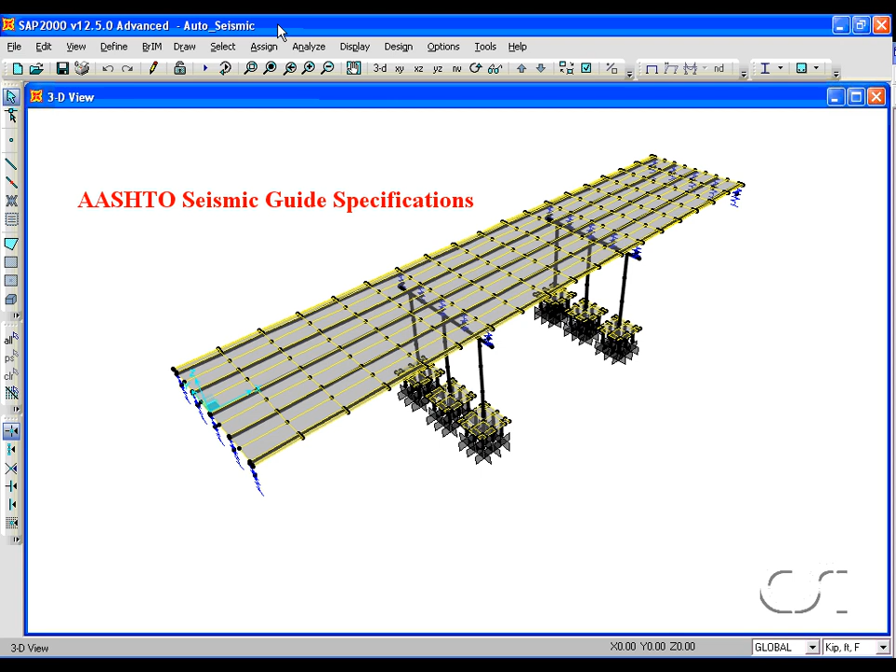This tutorial will show the powerful tools that the SAP 2000 Bridge module offers for the automated seismic design of bridges. Following the procedures described in the AASHTO seismic guide specifications, SAP 2000 can automatically calculate demand capacity ratios, including those for seismic design Category D bridges, and can produce a report containing all design results.

The seismic design of bridges using SAP 2000 consists of 8 basic steps. A quick overview of these 8 steps is as follows. In Step 1, we construct the model using bridge objects. The focus of the seismic design is on the bents. These bents will be isolated by the program when doing a pushover analysis.

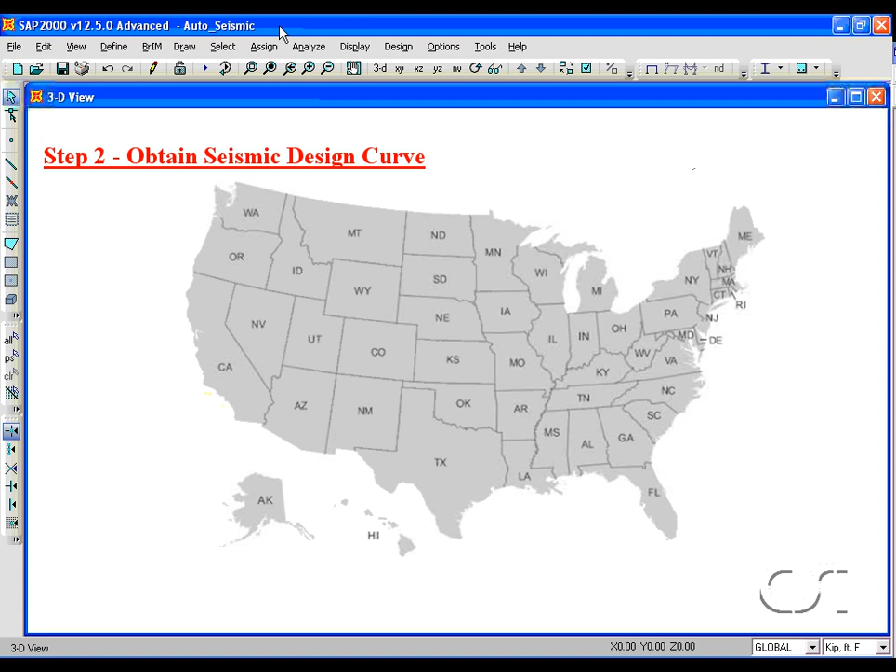In Step 2, we determine the ground motion hazard. This can be done by simply giving the bridge coordinates using latitude and longitude or zip codes. In Step 3, the program applies the dead load to the entire bridge and calculates the cracked section properties of the columns.

In Step 4, the program calculates the modes, performs response spectra analyses, which then gives the demand displacement values. If the bridge is a seismic design Category D structure, the bents and foundations are modeled with equivalent loads in Step 5.

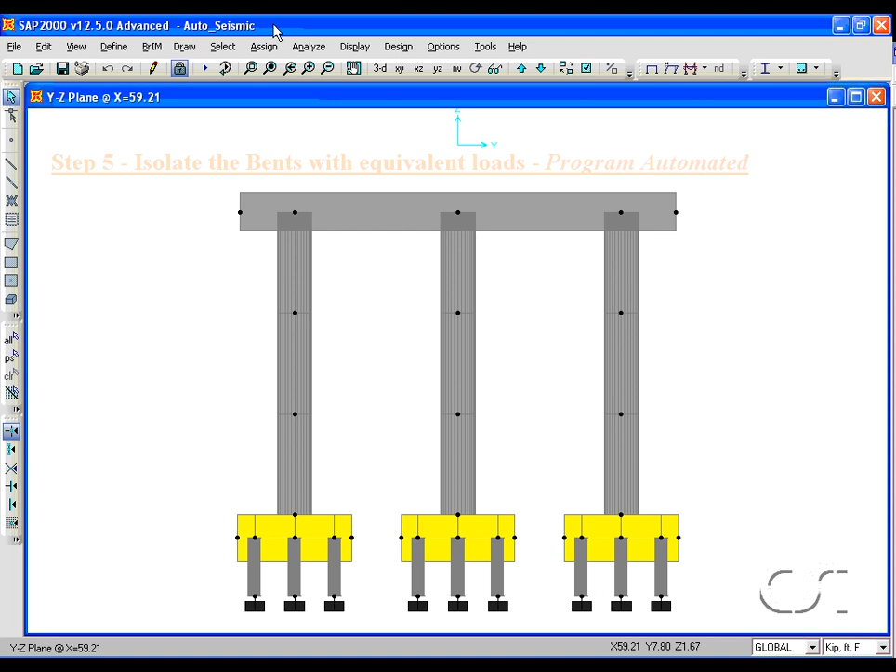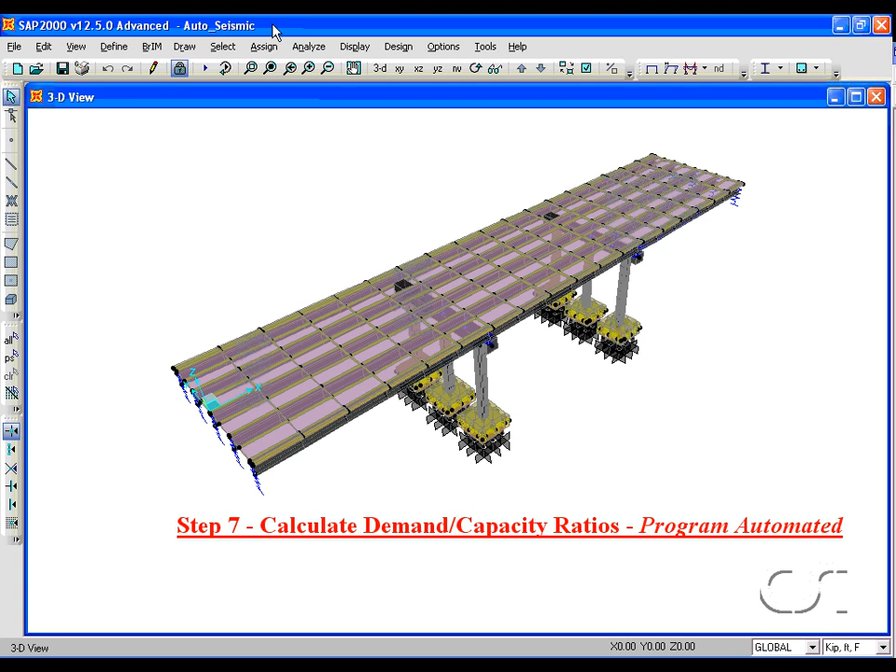In Step 6, the program calculates the displacement capacity; code equations are used for seismic design categories B and C, and a pushover analysis is performed for Category D. In Step 7, the program calculates the demand capacity ratios, and in Step 8, a seismic design report is produced. Now let's take a closer look at each of these steps.

Step 1, building the model. Our model has 3 spans of approximately 60 feet, consisting of an 8.5-inch slab supported with 5 3-foot 3-inch deep precast concrete girders. 2 bents, each with 3 36-inch diameter columns 26.5 feet tall.

These columns could have been fixed at their base, but for our model we are including a foundation consisting of a 4-foot thick pile cap supported by 14-inch diameter concrete piles with steel casing. Because seismic design is automated, the bulk of the work for the user is in building the bridge model. However, building a model is described extensively in other Watch and Learns, so we will go through this first step rather rapidly. Here's how we built the model.

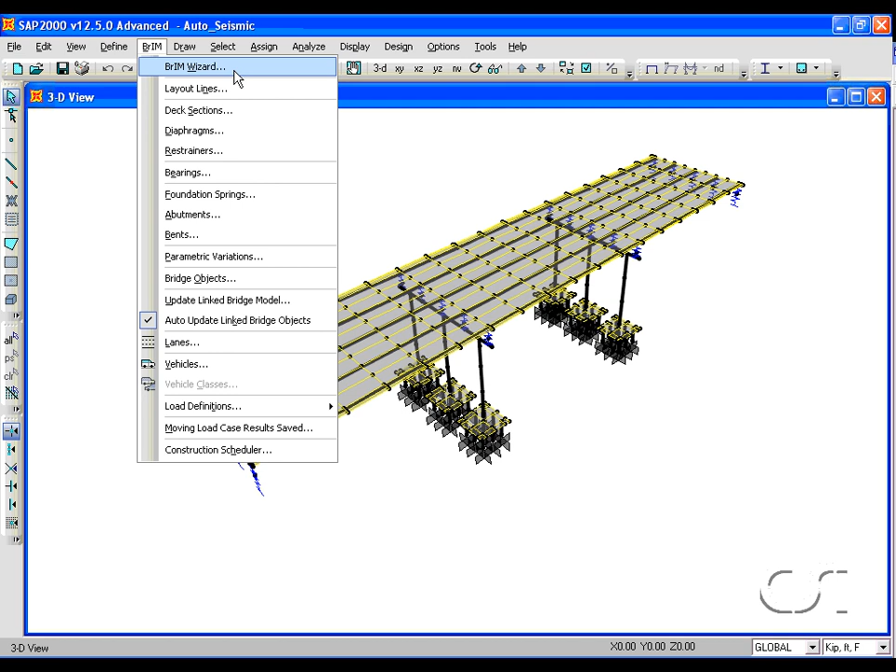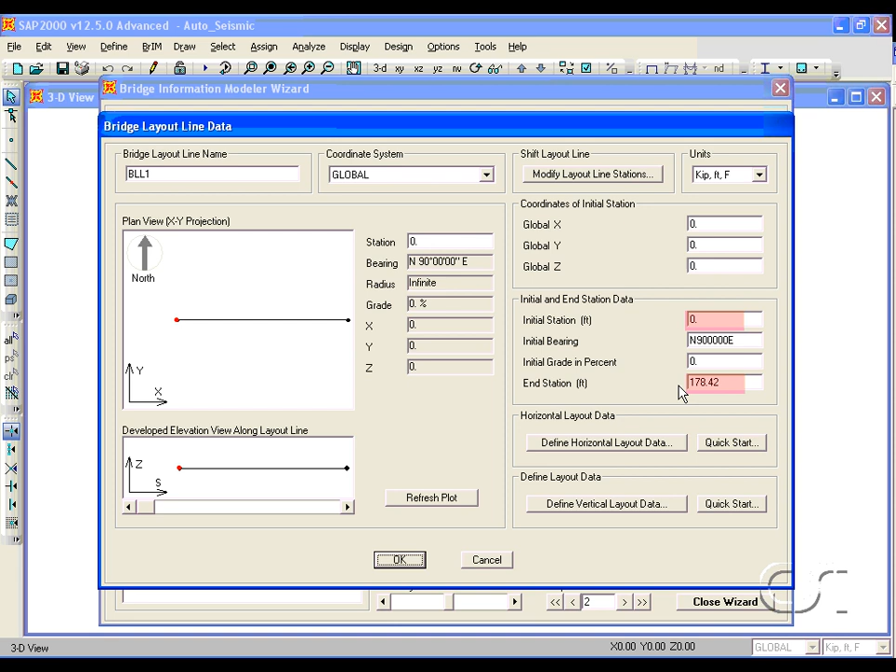We started by going to the Bridge Information Modeler wizard. The wizard guides you through the modeling procedure. The first item is the layout line. Double-clicking shows that we have one line defined. The line provides the coordinate stations for the bridge. Our model has 2 stations, an initial station and an end station 178.42 feet away.

For materials, we will use the 4000 psi concrete and the A615 Grade 60 for the reinforcing steel. Check the Show Advanced Properties option so that we can review the nonlinear settings for these materials.

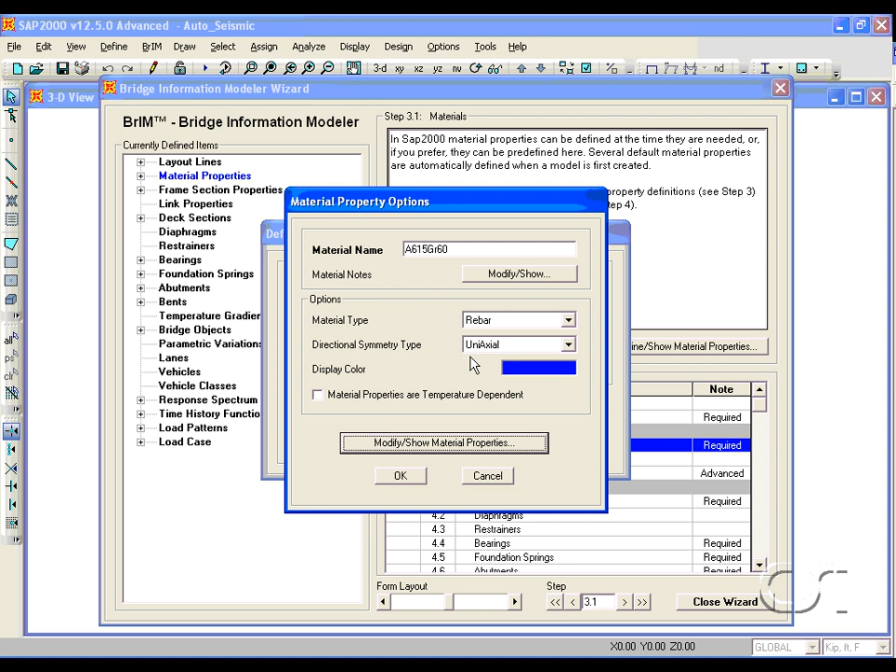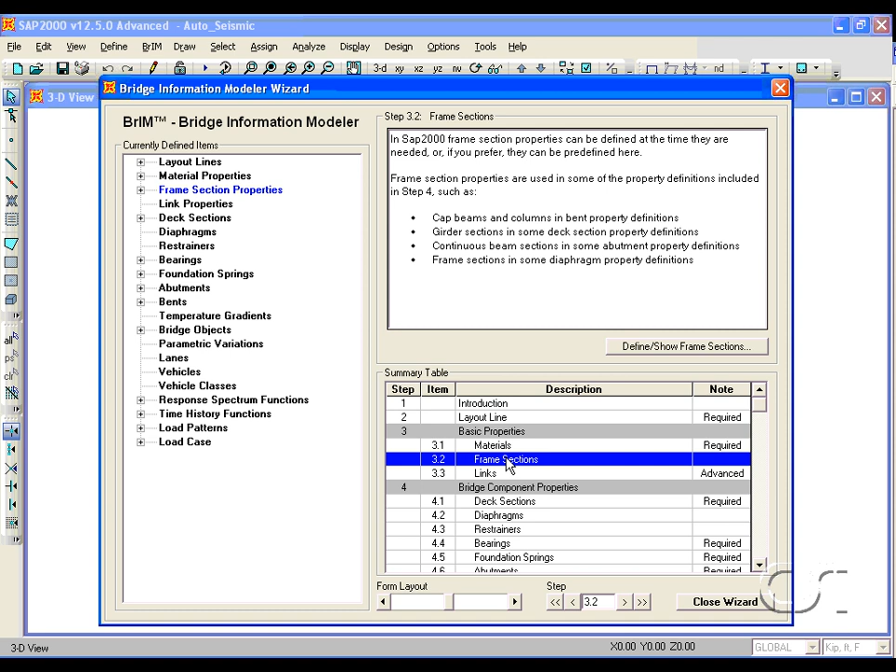Next on the list is the frame sections. The cap beam, the column, the precast I girder, and the pile. The BRD sections shown on the list are equivalent frame sections created by the program to represent the combined behavior of the deck plus the precast girders when doing a spine model. The cap beam is a rectangular section 39 inches deep by 42 inches wide.

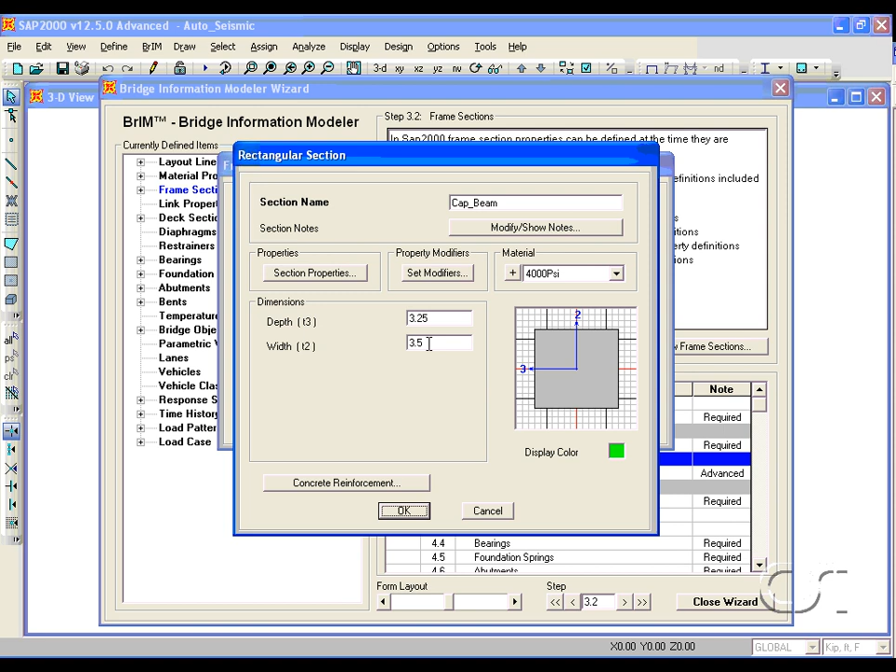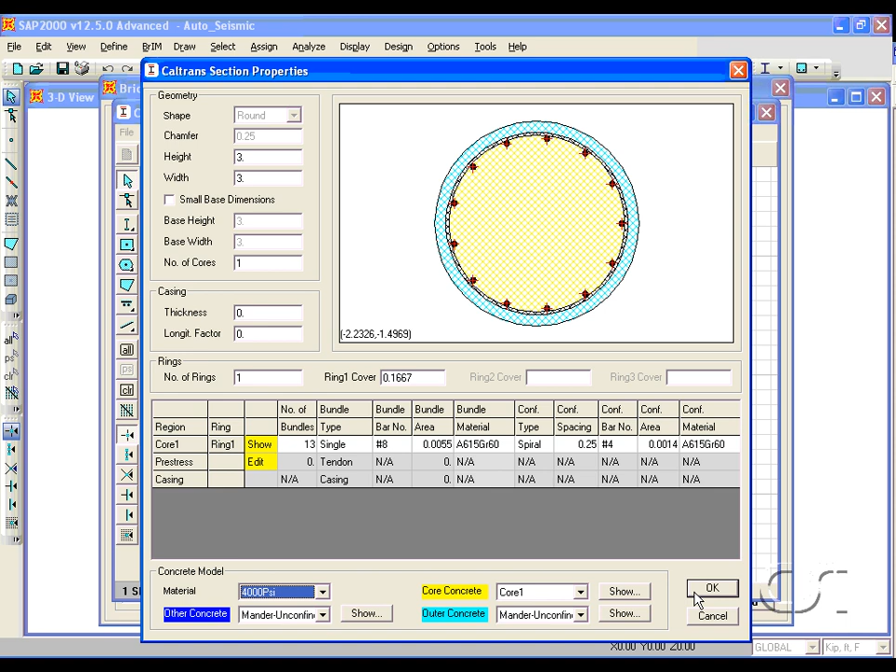The bent column section was created using the section designer. A right click shows that the section is 3 feet in diameter with 13 number 8 bars for longitudinal reinforcing and number 4 spiral confinement. The girder was created using the precast concrete girder form. Note that it is 39 inches deep and 13 inches wide at the top.

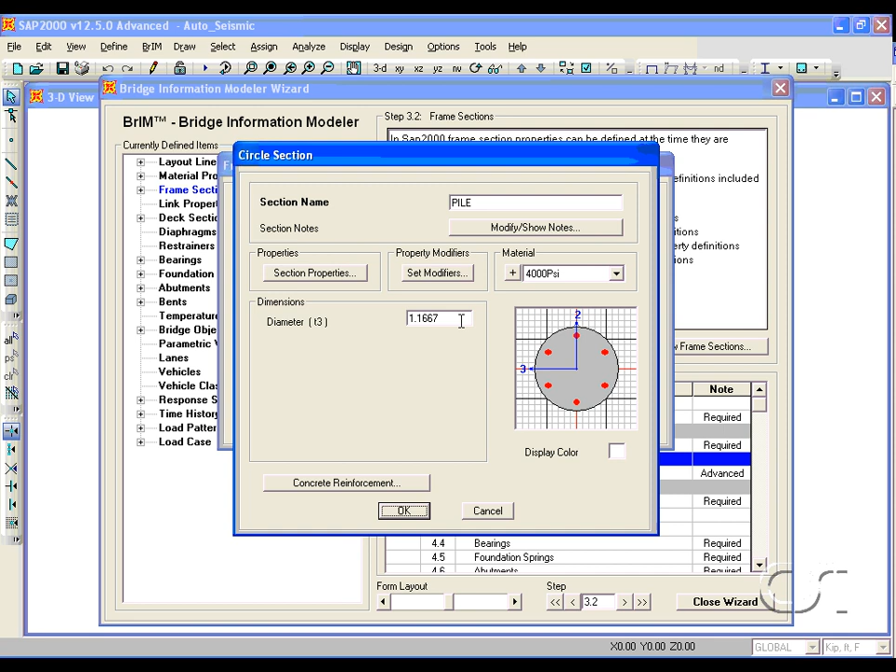The last frame section created by us was the pile. We created a round concrete section with a 14-inch diameter. However, the pile has a steel casing, so to account for this, we assign property modifiers to increase the moments of inertia.

Now we move on to the bridge component properties. Double-click on the deck section. We have a single deck defined with 3 interior girders and 2 exterior girders, which gives us a total of 5 girders. The girder section is the precast section just discussed. The deck has a width of 38 feet 10 inches and a slab thickness of 8.5 inches. The program takes this complicated cross section and converts it into a single BRD frame section for use when doing spine models.

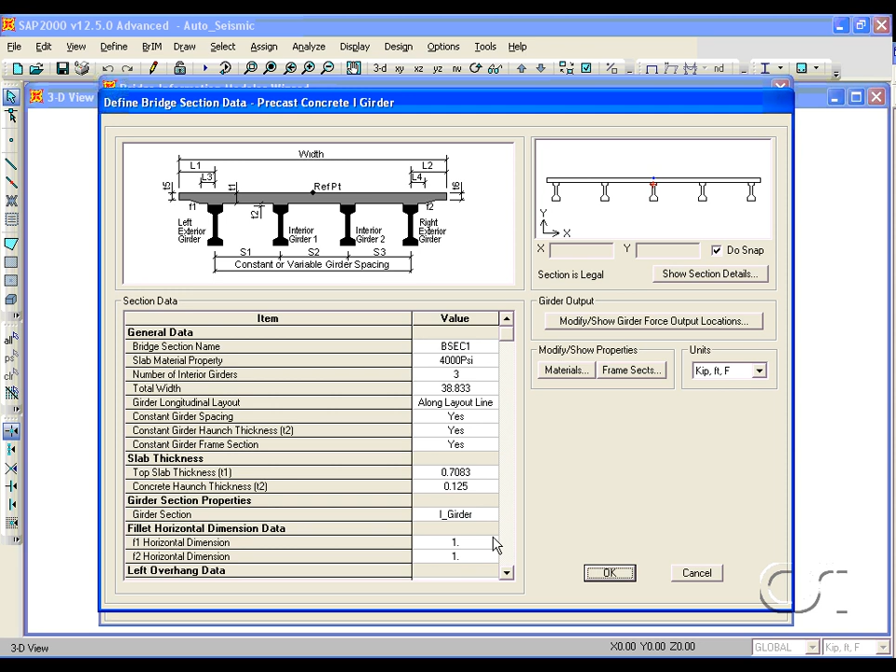The next item to review is the bearings. We have 2 different bearings. The first bearing is for use at the abutments and restrains motion in the vertical direction. The second bearing is used at the bents and restrains translation in all 3 directions.

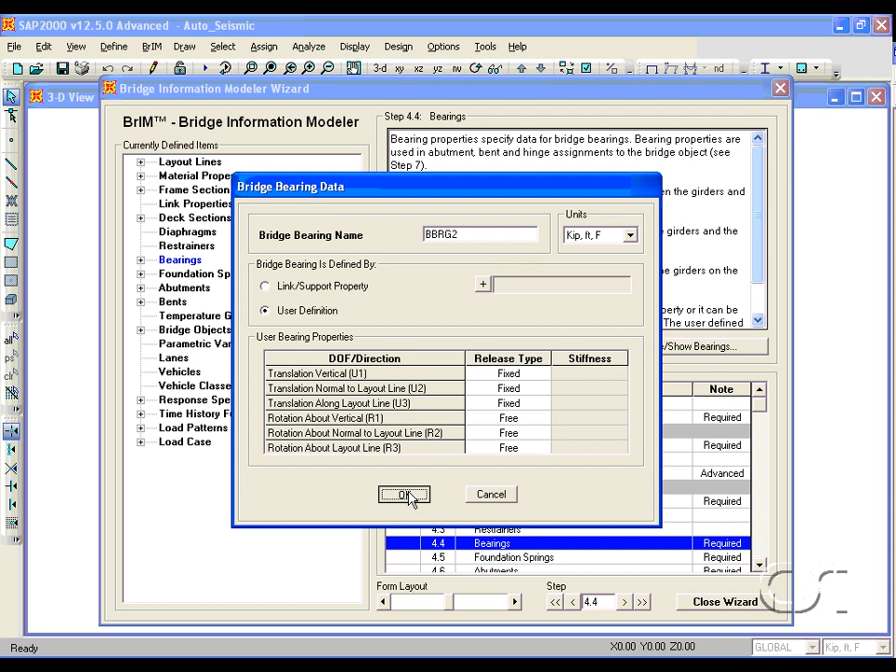Next is the foundation spring. We have defined one spring property to be used at the bottom of the bent columns. In this case, all releases are set to free, as we want the forces from the columns to be transferred directly into the pile cap foundation. If we were not explicitly modeling the foundations, we would set some or all of these releases to fixed.

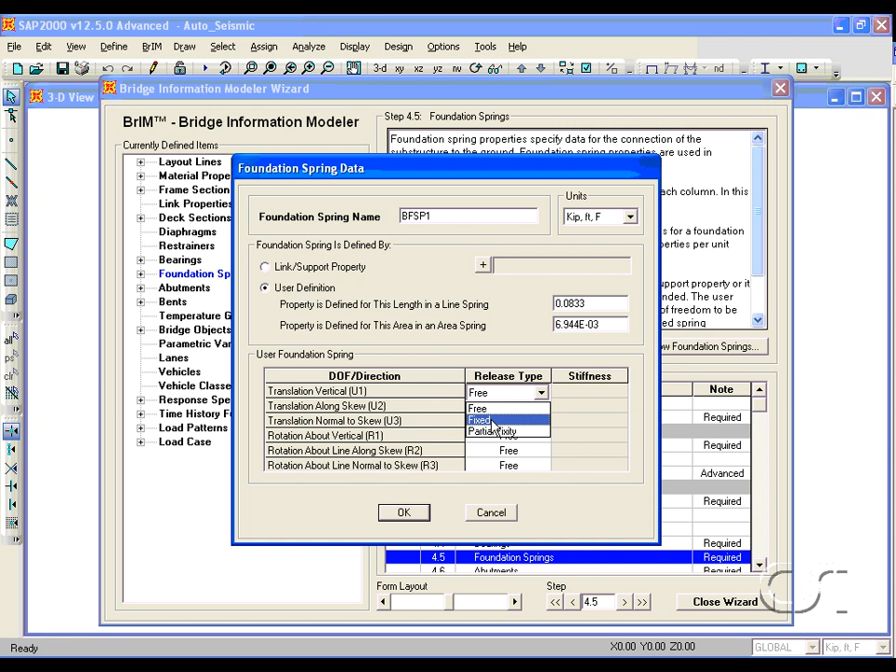For the abutments, we have a single type that provides a fixed connection to the bottom of the girders.

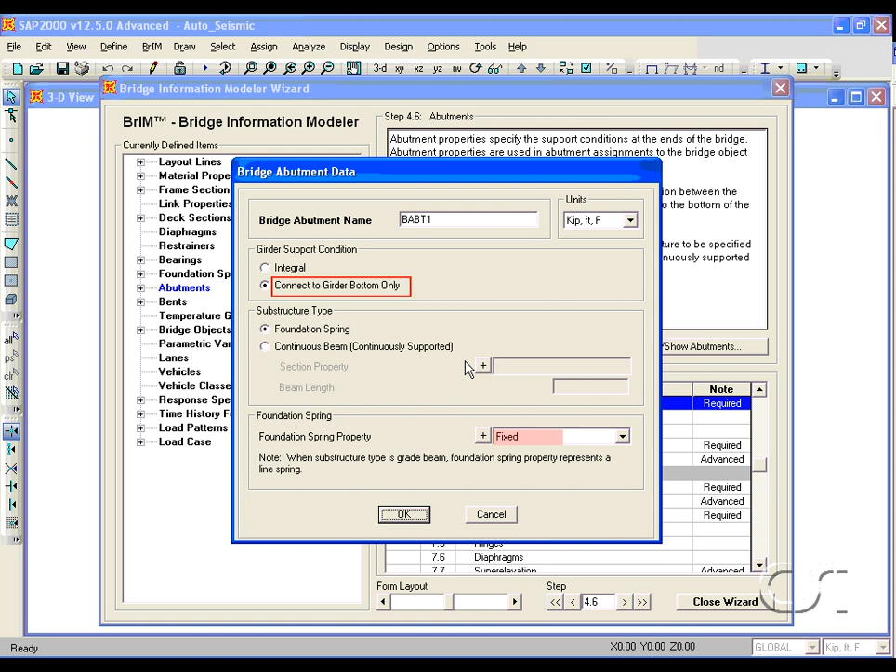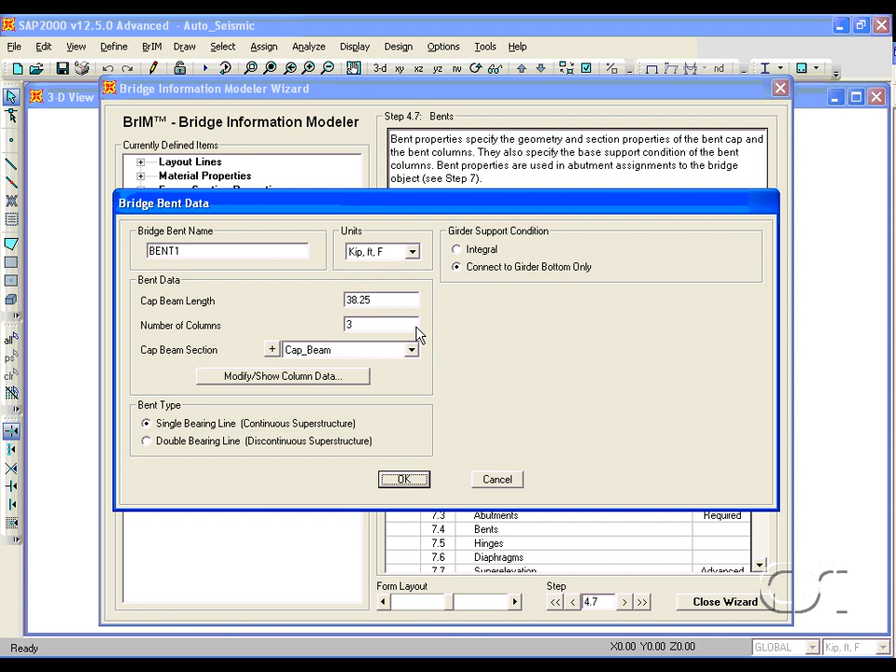We have defined a single bent for both locations. The bent consists of 3 columns topped with the cap beam we defined. The columns are 26.5 feet tall and use the previously defined foundation springs for the base support. At the top of the columns, all connections are fixed to the cap beam.

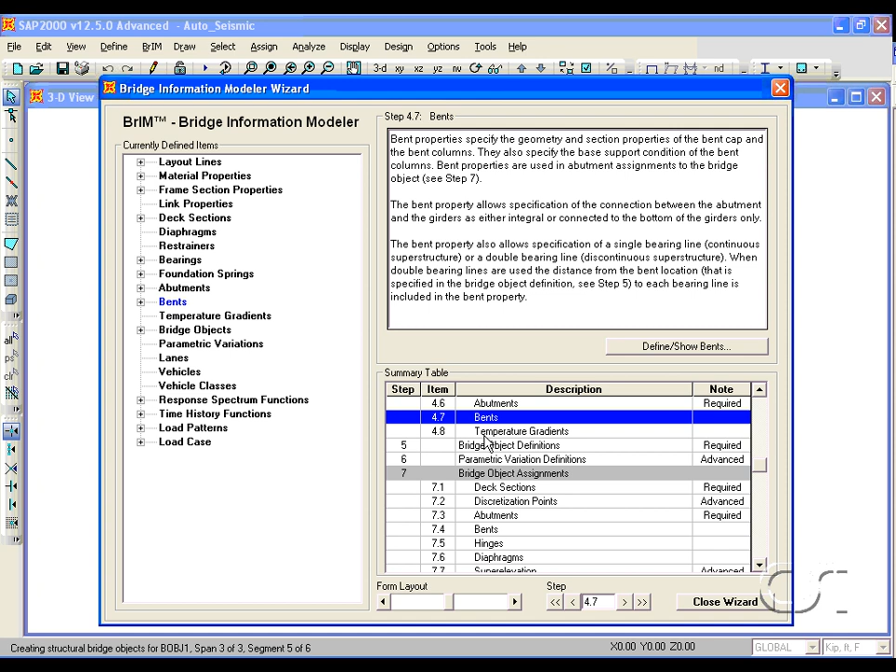Next is the bridge object definition. The bridge object tells SAP 2000 how to assemble the previously defined components into a bridge system. The bridge object assignments allow SAP 2000 to isolate the loads and the bents that are used when doing the automated seismic analysis.

For this model, we have a single bridge object that contains all of the components for our 3-span bridge. The reference line for the bridge defines the abutment and bent locations. Selecting spans and clicking the Show button, we see that the deck section is assigned to each span with no variation.

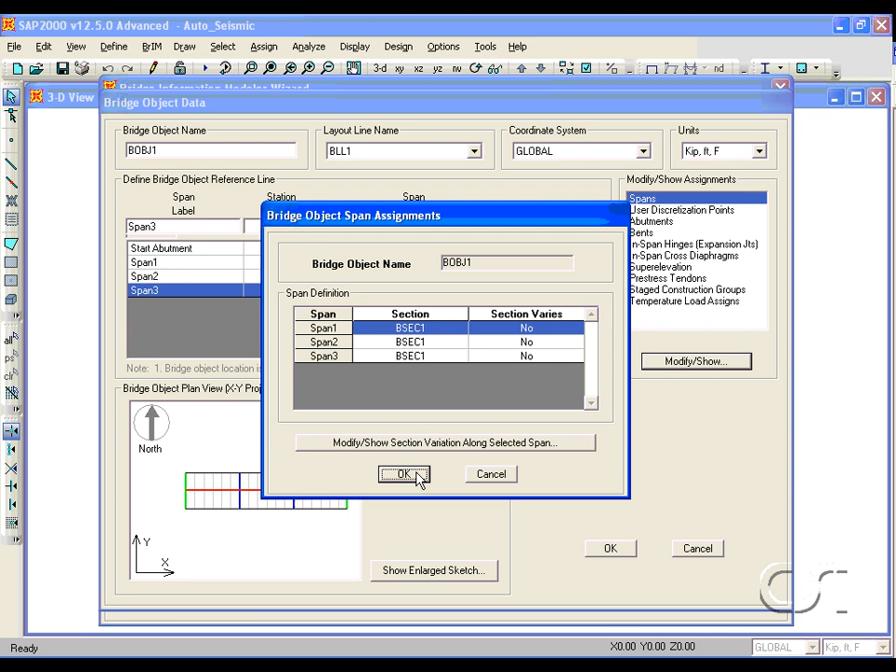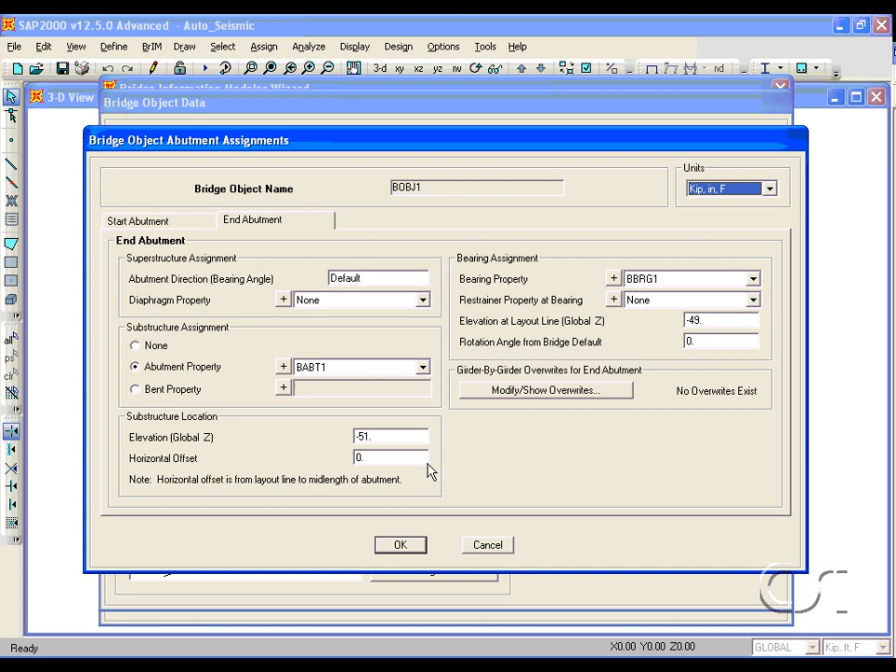The start and end abutments are the same. A 2-inch thick bearing resting on our fixed substructure. The bent assignments for each span are also identical. Again, a 2-inch bearing resting on our bent structure.

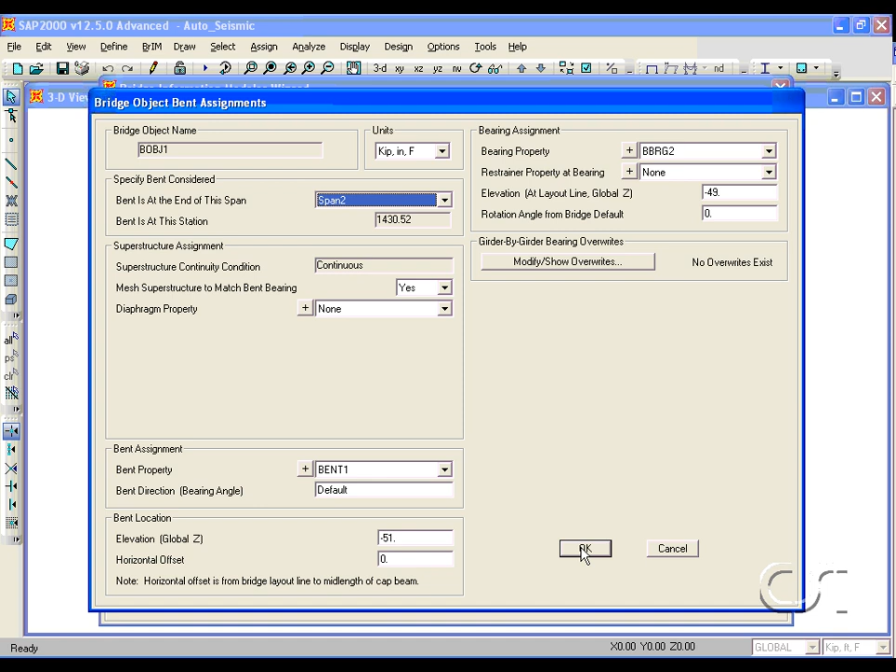After doing the assignments, it is important to link the model so that all components are included in the model.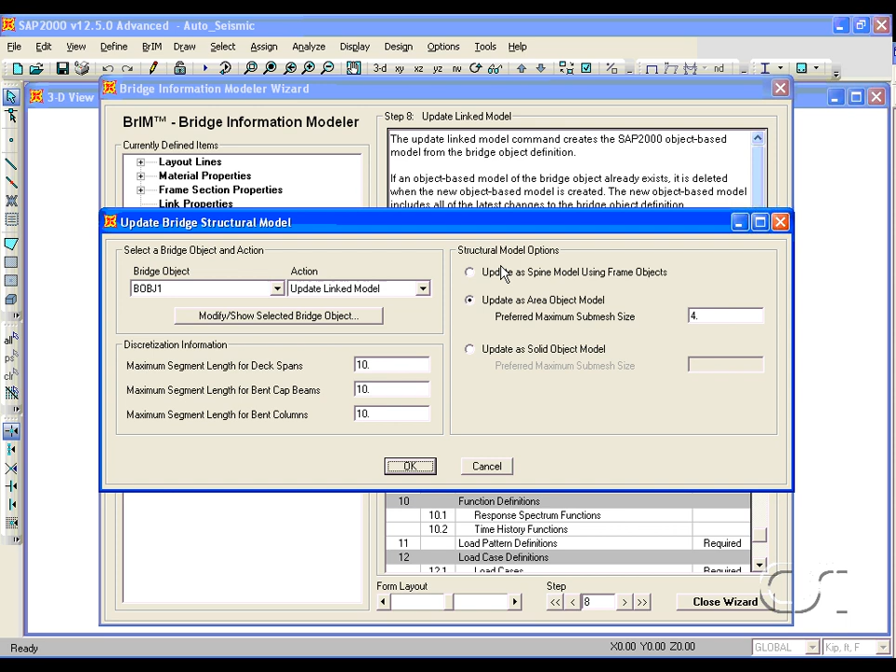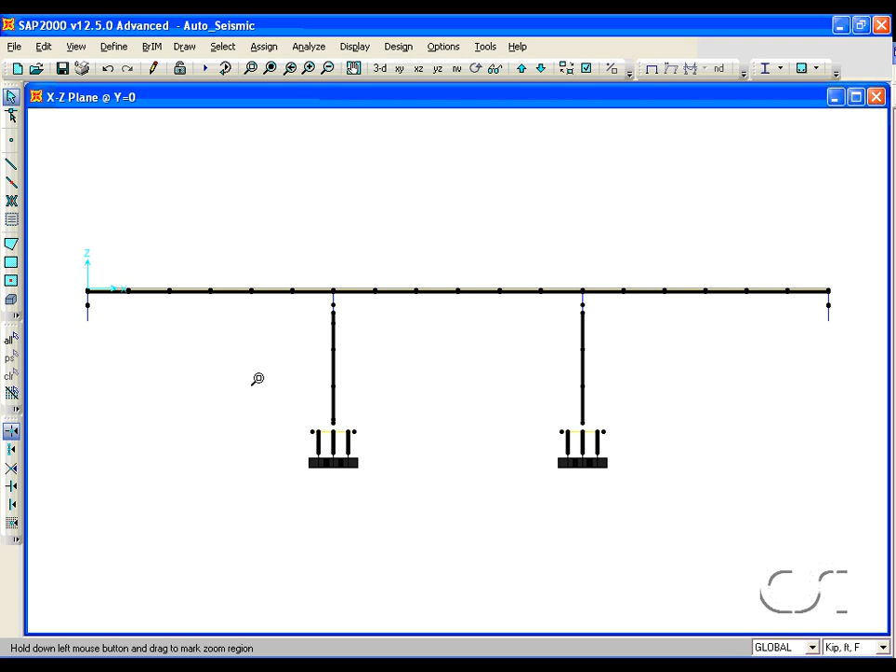Our superstructure is complete. The only item we did not review in the Bridge Wizard was the foundation. The foundation consists of a 4-foot thick area object for the pile cap, supported by the pile objects. Note how the bottom of the column is above the area object that represents the pile cap.

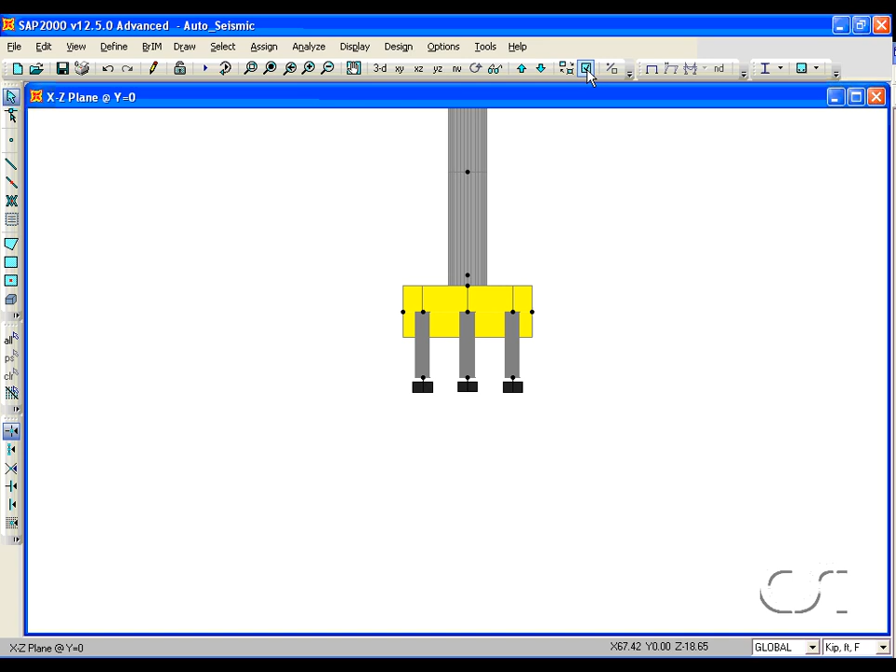If we extrude the objects, we can see that this is geometrically correct due to the thickness of the pile cap, but because the pile cap was modeled with a planar object, we use a weld constraint to connect the bottom of the column to the center of the planar pile cap.

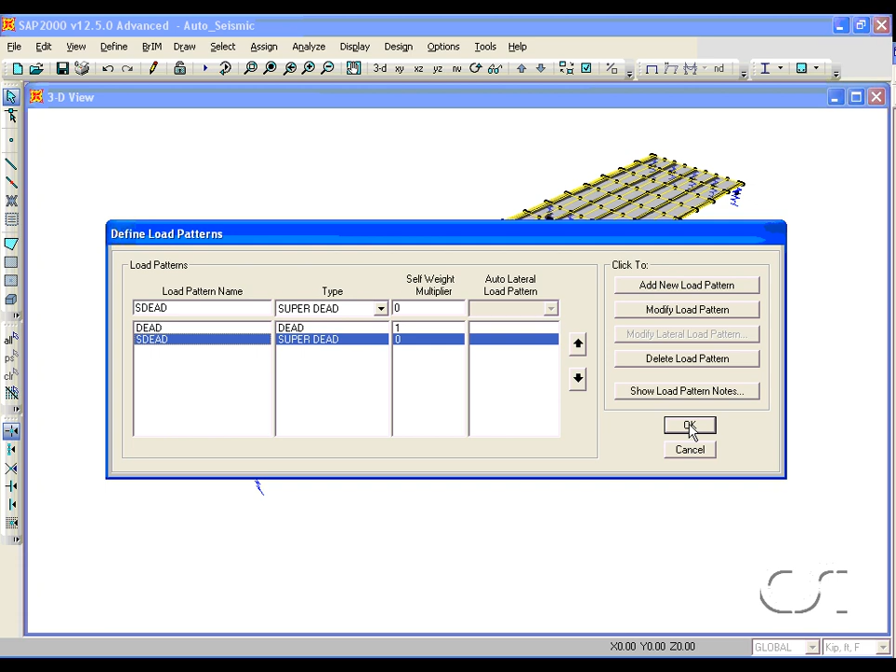For this model, the only static loads we will apply will be the dead and superimposed dead needed for the seismic analysis. We are now ready for step 2. Step 2 is where we determine the ground hazard.

We go to the Define, Functions, Response Spectrum command, and here we have many choices for response spectra functions. We will choose the National Cooperative Highway Research Program spectra. Function values may be determined by the program from latitude-longitude, by zip code, or by user input.

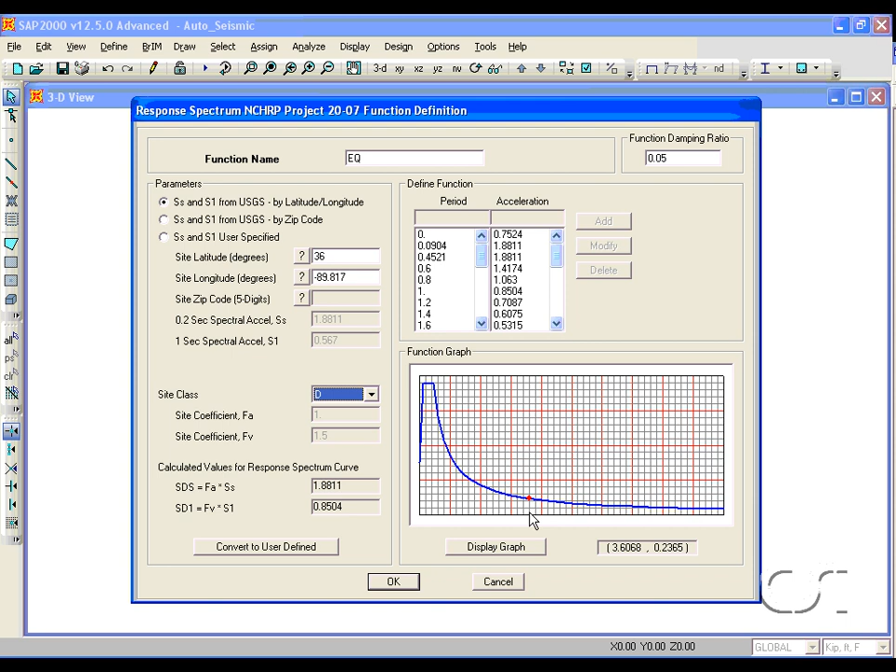We will input latitude and longitude. Note how the spectra values change based on the input. We will set the site class to D. With the determination of the site hazard, we are just about ready to start the automated seismic design.

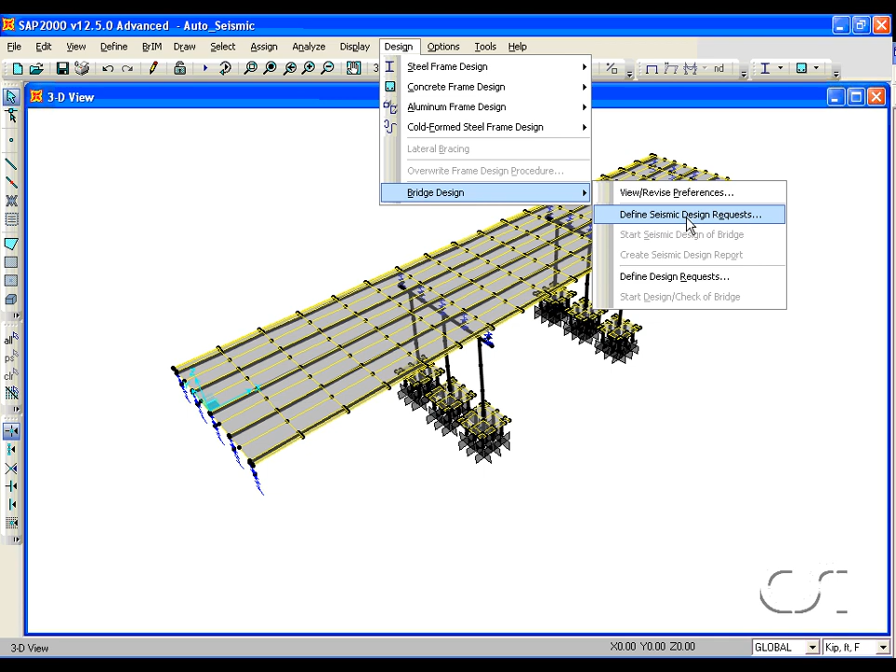The last bit of information that we must input is the design request. This tells the program what type of seismic design to do. Go to the Design, Bridge Design, Define Seismic Design Request command, and click on the Add New Request button. Note that the bridge object we defined is selected, as our model has only one bridge object.

Click the Modify/Show button and review the options set by the program. Note that the EQ function is selected, that the seismic design category is set to D, so a pushover analysis will be done. Also note that the entire structure is being used for the gravity load case. The cracked sections will be determined by the program, and that the modal load case will be program determined.

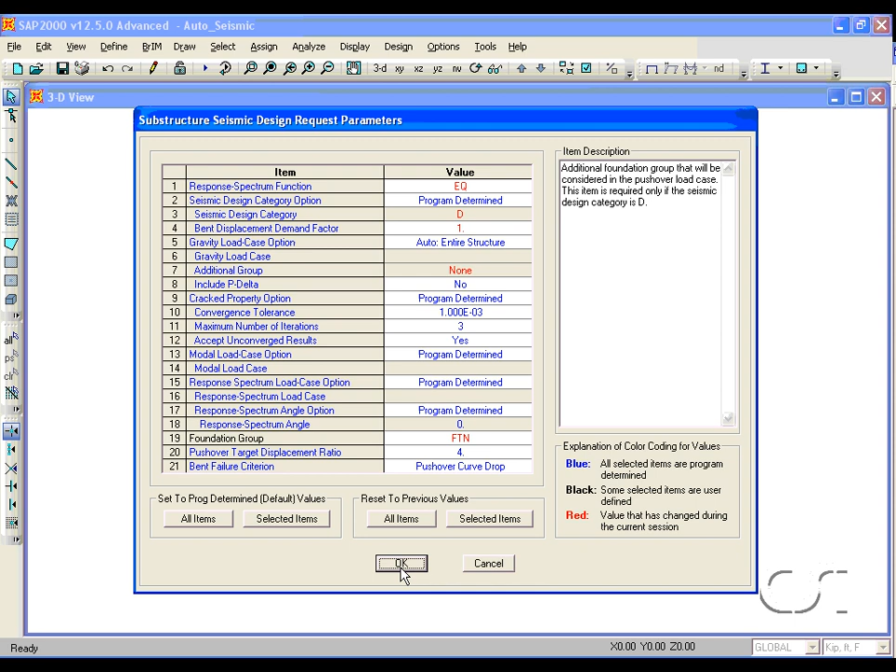Lastly, we need to identify the foundation group because we did not fix the columns at the base. Just to reiterate, the only load cases defined at this time are for the dead loads. We will return to this form after running the seismic design.

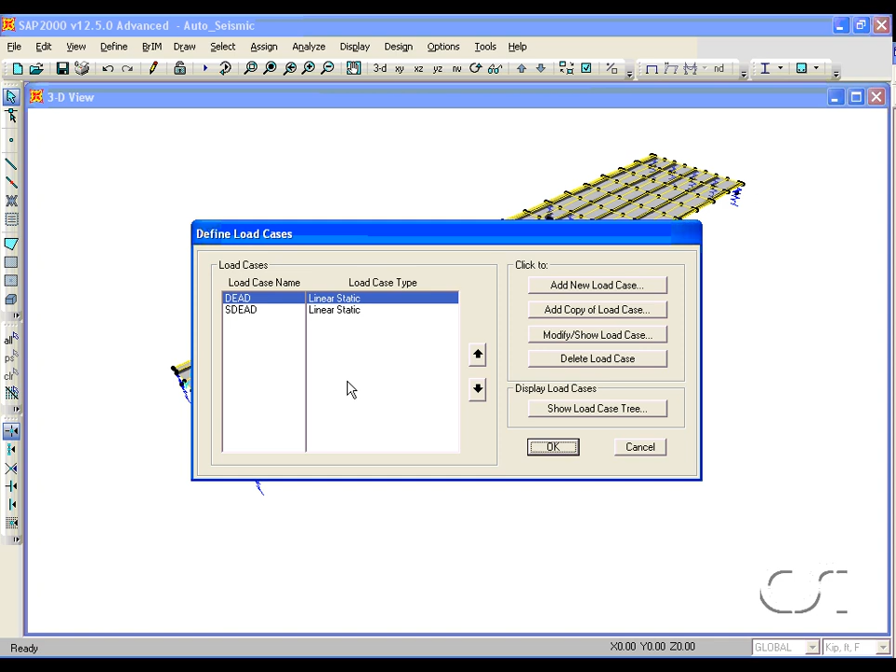The program will automatically create load cases for all of the other analyses that will be done, including modal and pushover. Now, we will start the automated seismic design procedure, which will do steps 3 through 7. This may take some time as a large number of different analyses are being done by the program.

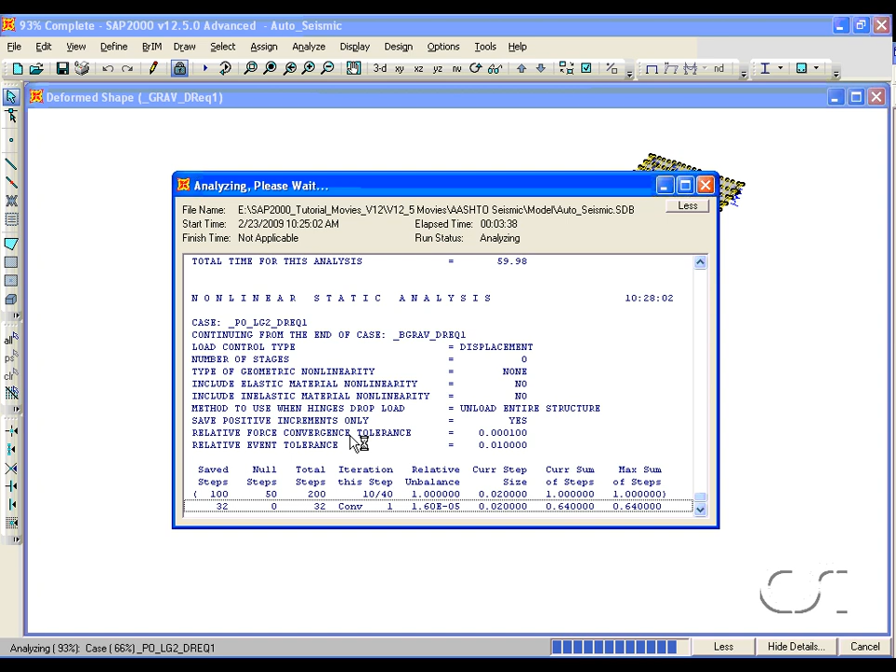Now that the analyses are complete, we can scroll through the analysis window to see exactly what the program was doing. First, it applies a dead load to the entire structure and iterates to determine the cracked section properties.

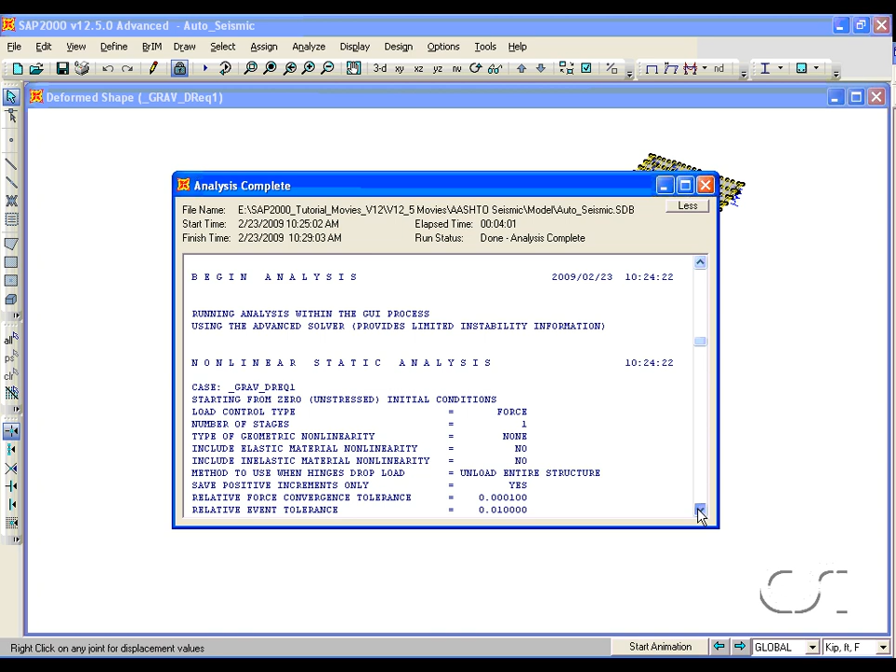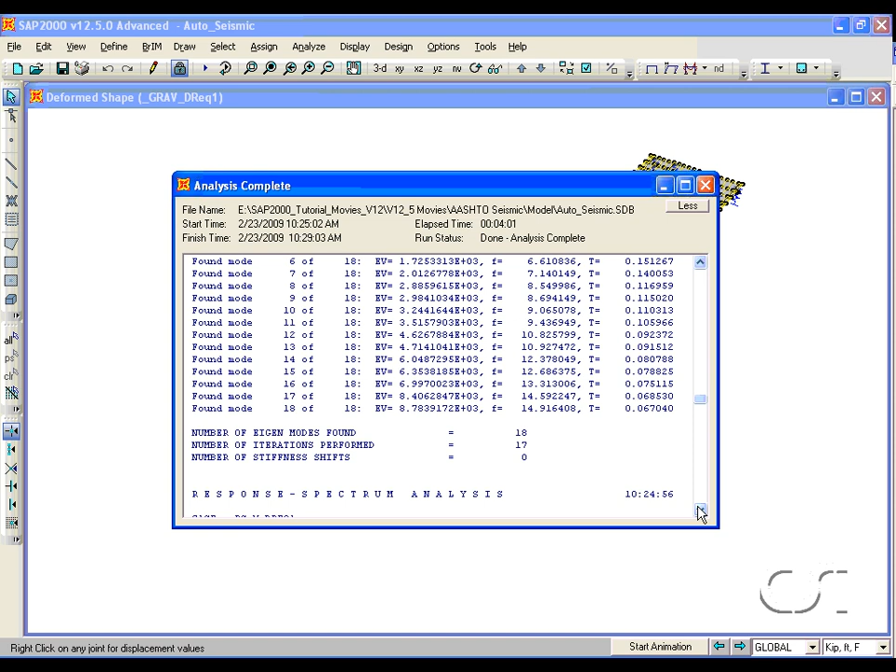Based on the cracked sections, it performs a modal analysis. With these modes, it performs 3 different response spectrum analyses. Next, it performs a dead load analysis using just the bents and equivalent loads. And lastly, it performs 4 different pushover analyses.

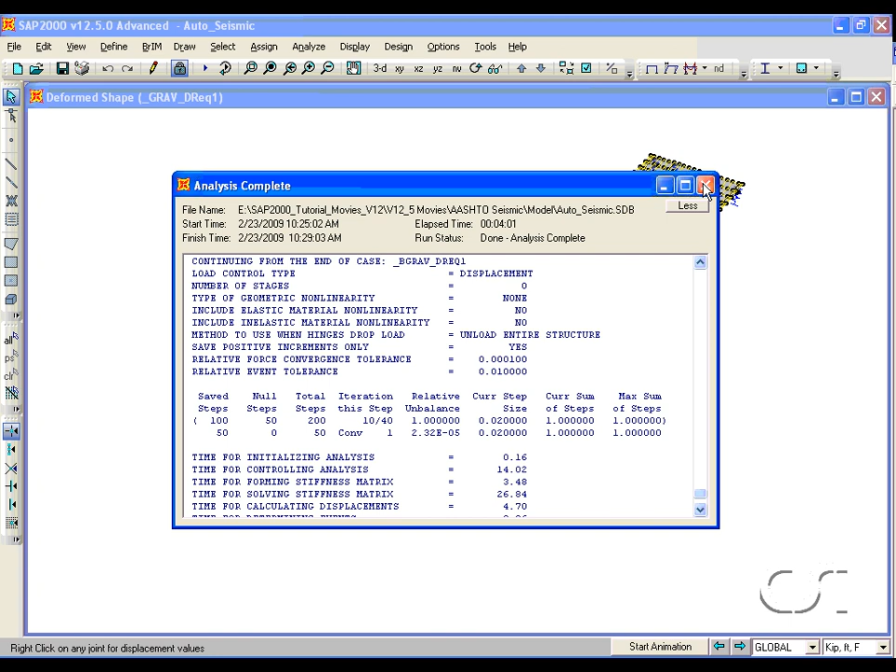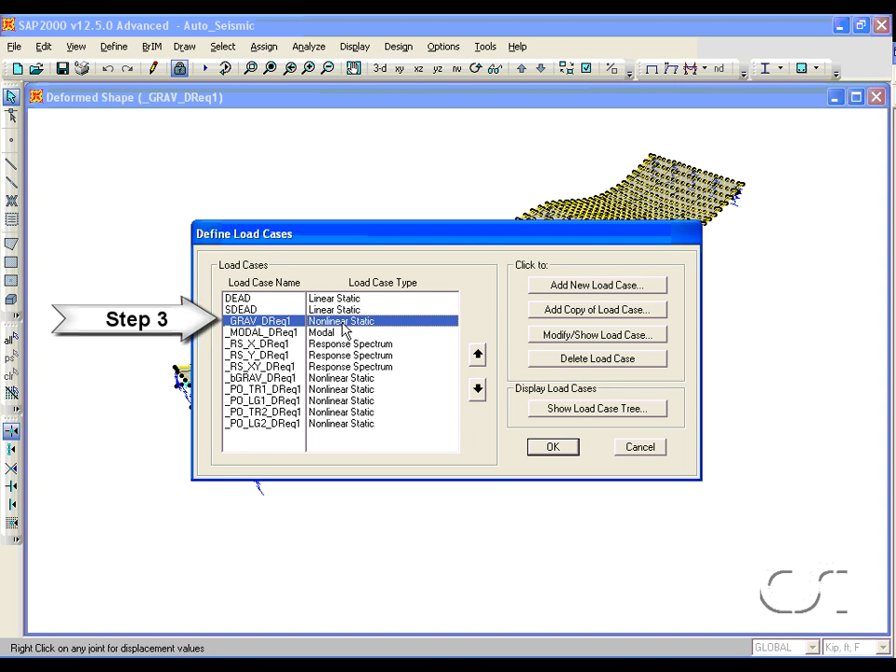Next, we will return to the load case form for a more detailed look at the automated analyses. Note all of the additional load cases that have been generated by the program. The first one represents the results of step 3, the application of dead load and the calculation of the cracked section properties. Dead load is applied to the entire structure along with the section modifiers.

This load case represents an iterative process when calculating the cracked sections. Element forces are determined, cracked sections are calculated, stiffnesses are modified, and the cycle is repeated until convergence is reached.

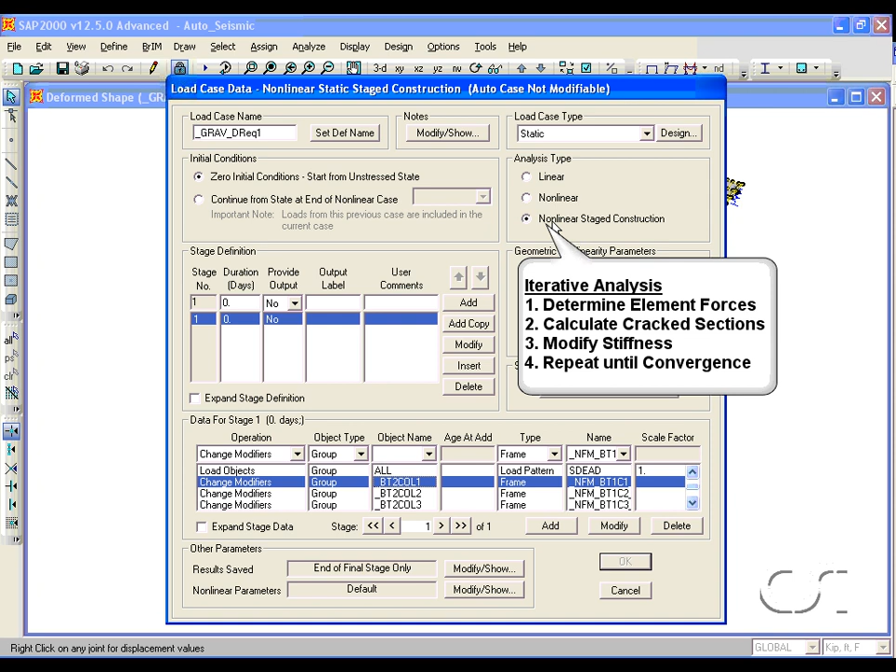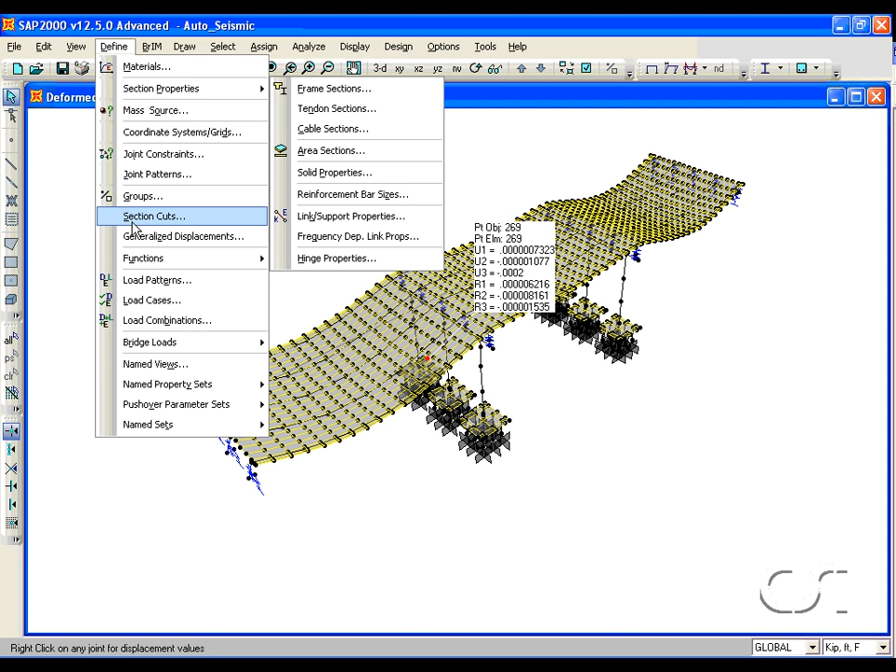The actual cracked section modifiers used may be reviewed by going to the Define Named Property Sets Frame Modifiers command. Here we see for Bent 1, Column 3, the moments of inertia are multiplied by approximately 0.28.

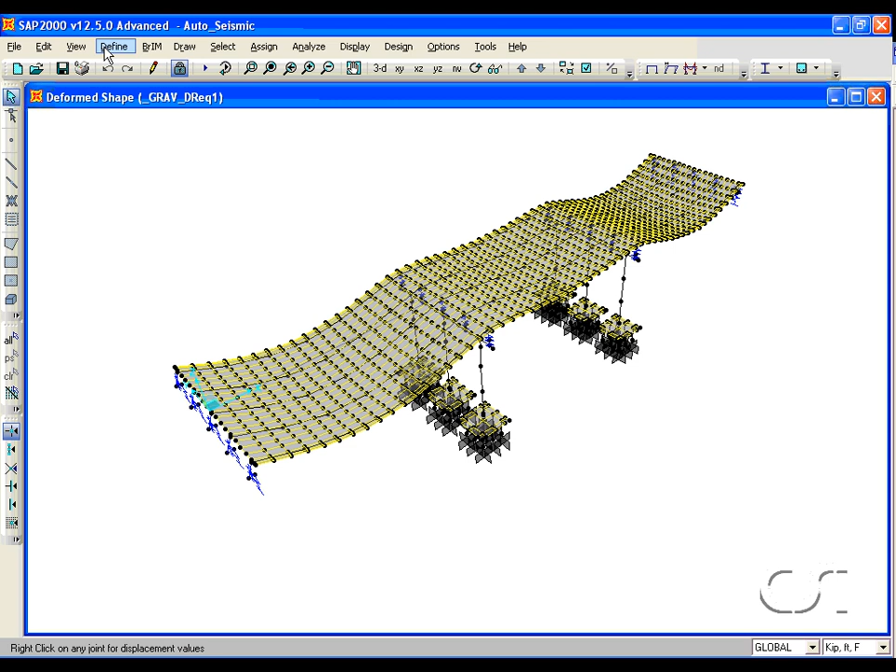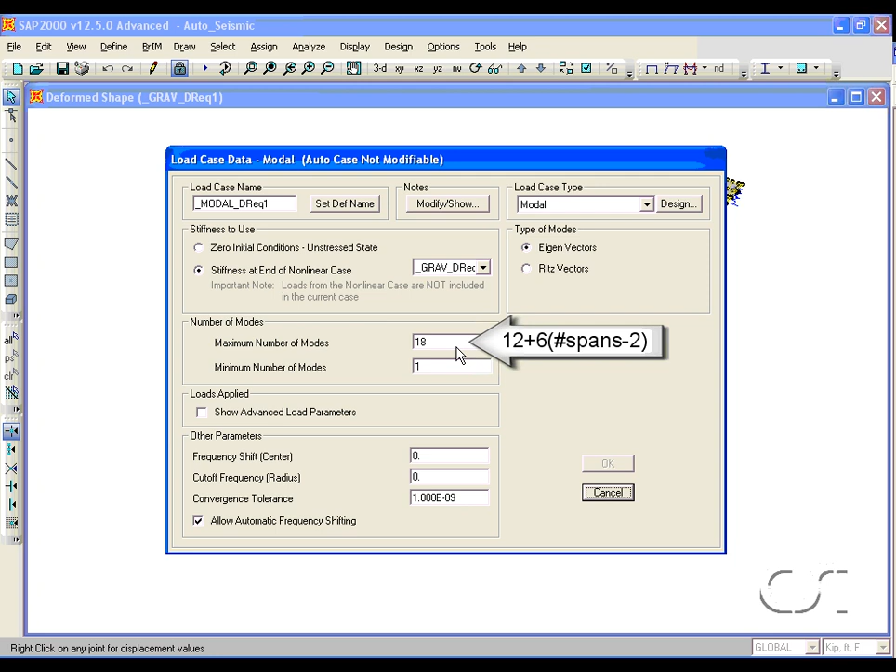The next four cases represent step 4, mode extraction, and then response spectrum analysis to calculate the demand values. Note that the modal case uses the gravity dead load case with the cracked sections as the starting stiffness. For this bridge, the program asks for 18 eigenvectors. The number of modes is determined by the equation 12 plus 6 times the number of spans minus 2, but no less than 12.

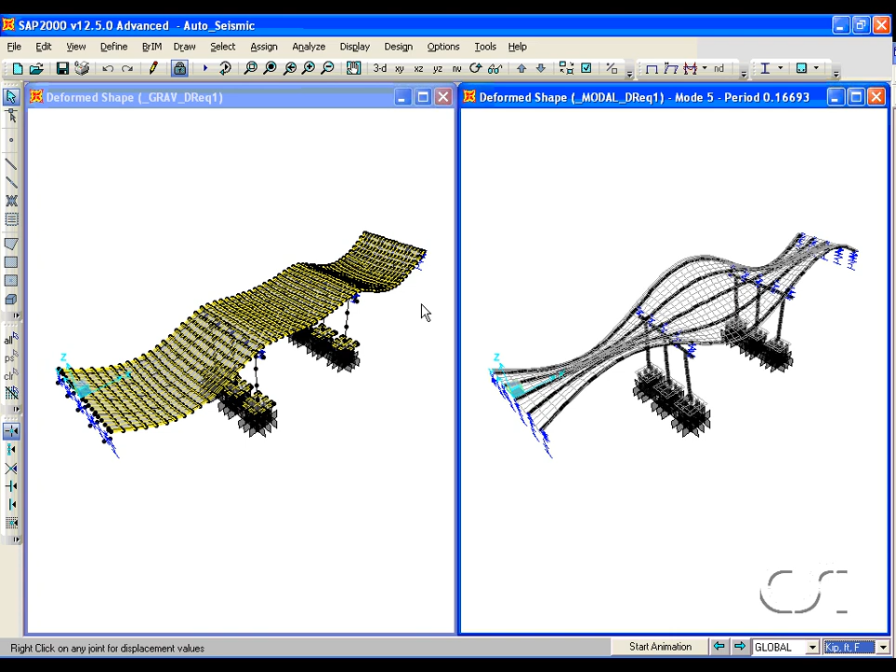Here are some of the modes calculated by the program. The next case is the response spectrum case in the x direction. Modal damping of 5% is used. The following case is the response spectrum analysis in the y direction.

And the last case applies the response spectra in both directions and combines them according to the AASHTO seismic guide specifications that require results to be combined using the 100-30% rule in each of the major directions.

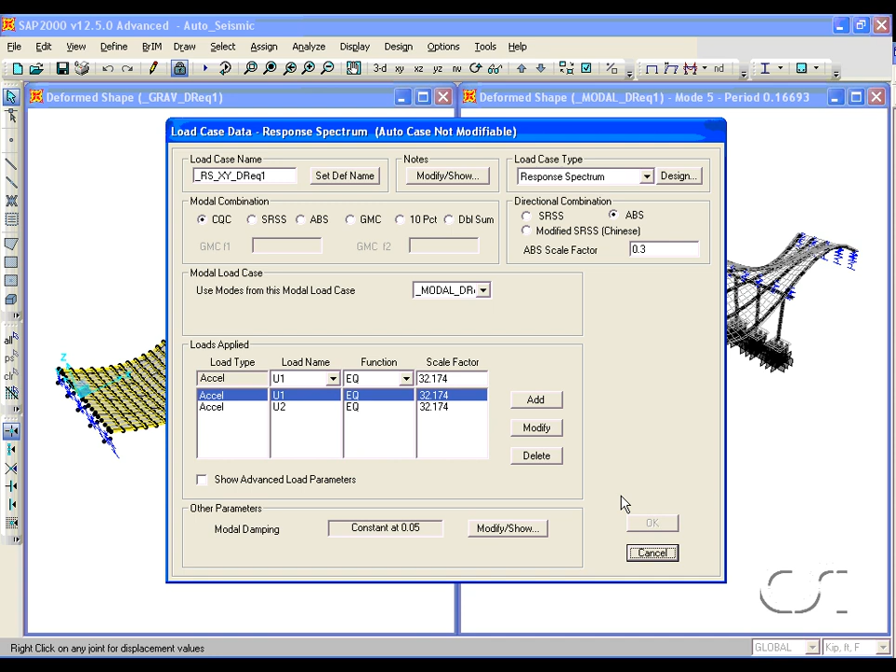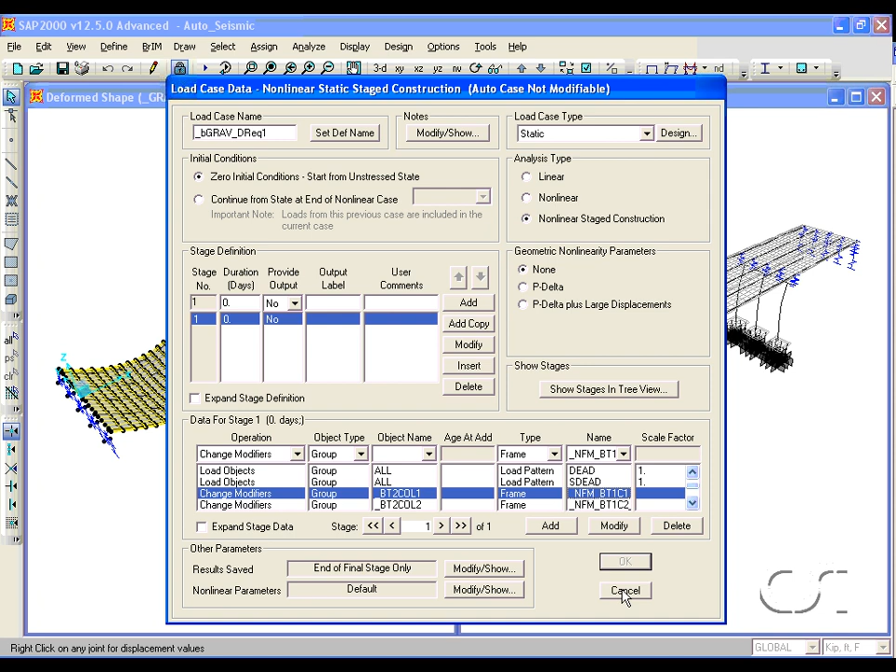The next case is associated with step 5, and again represents a dead load case, but this time consists of only the bents and foundation structure loaded with equivalent loads from the bridge deck. Again, cracked sections are used. This step is needed because the structure is seismic design category D, which means a pushover of the bents is required.

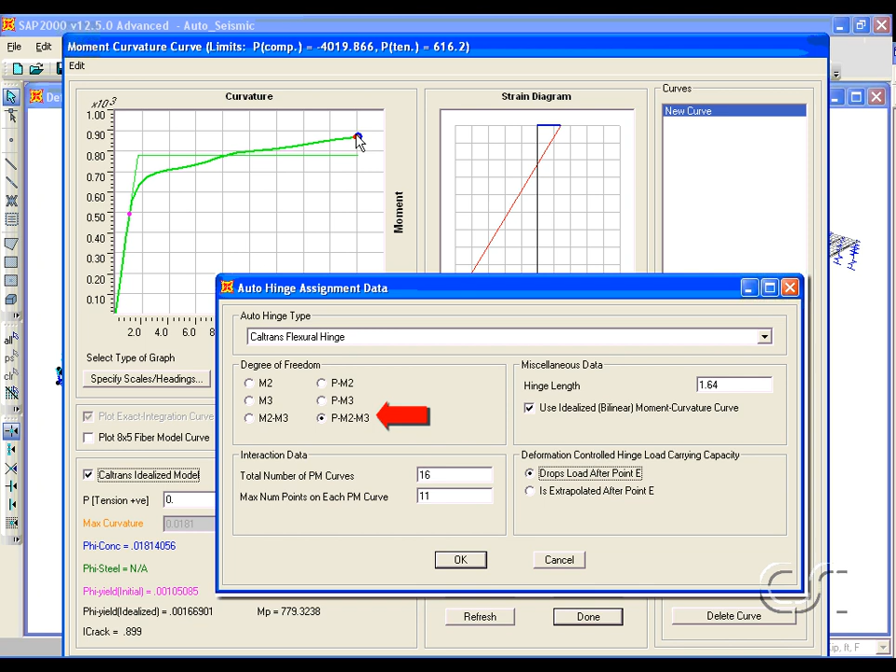Prior to step 5, hinge properties are calculated for the pushover analysis. The automated seismic design request uses hinge properties based on the AASHTO Caltrans idealized model. Note that the program uses PMM hinges, so properties are dependent on axial force, which varies as the bents are pushed.

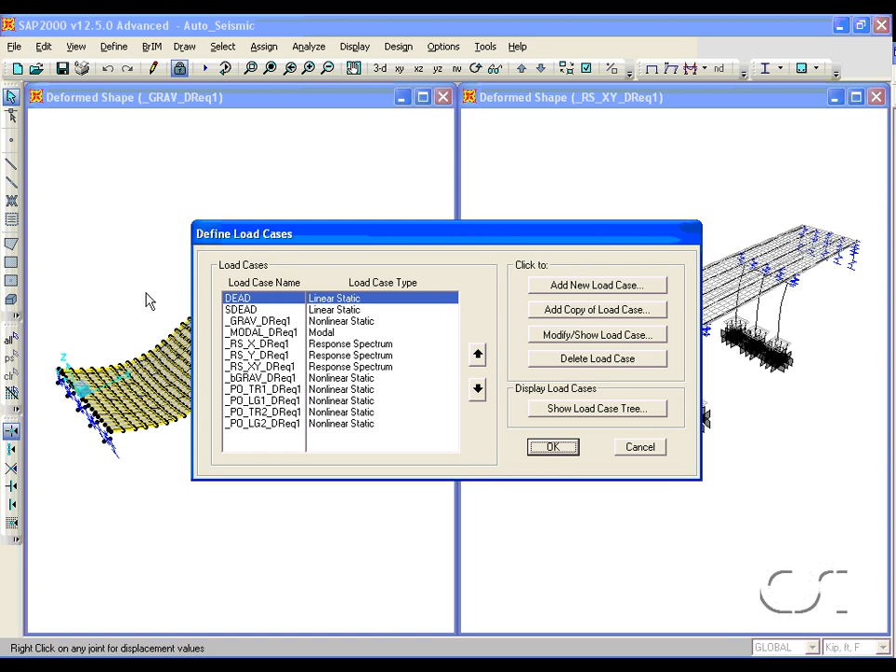Because the seismic design category is D, the program automatically performs a pushover analysis on the bents that are part of the earthquake resisting system. The last four load cases are associated with step 6 and represent pushover analyses in two directions on each of the two bents. The first case pushes bent 1 in the transverse direction. Note that the pushover starts from the gravity case for the bents. The program automatically sets all of the parameters.

The next load case is the pushover on bent 1 in the longitudinal direction. The third pushover case is for the second bent in the transverse direction, and the last pushover case pushes the second bent in the longitudinal direction.

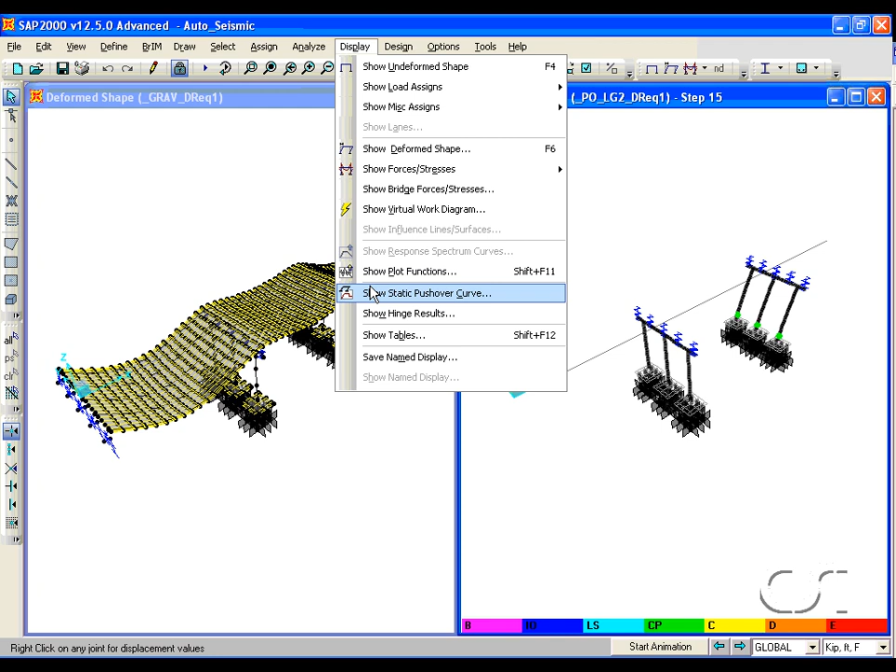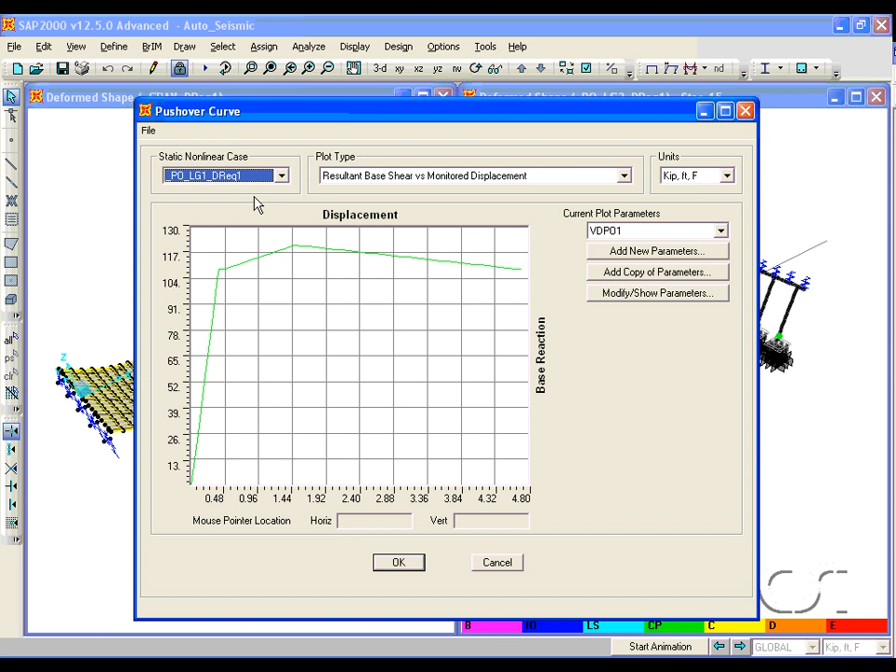From the pushover analysis, the program determines the displacement capacity. Going to the Display Show Static Pushover Curve command, we can view the pushover curves for each of our 4 pushover cases. Typically, the displacement capacity is taken as the point on the curve that is located just past the peak base shear location, where the base shear is 99% of its peak value.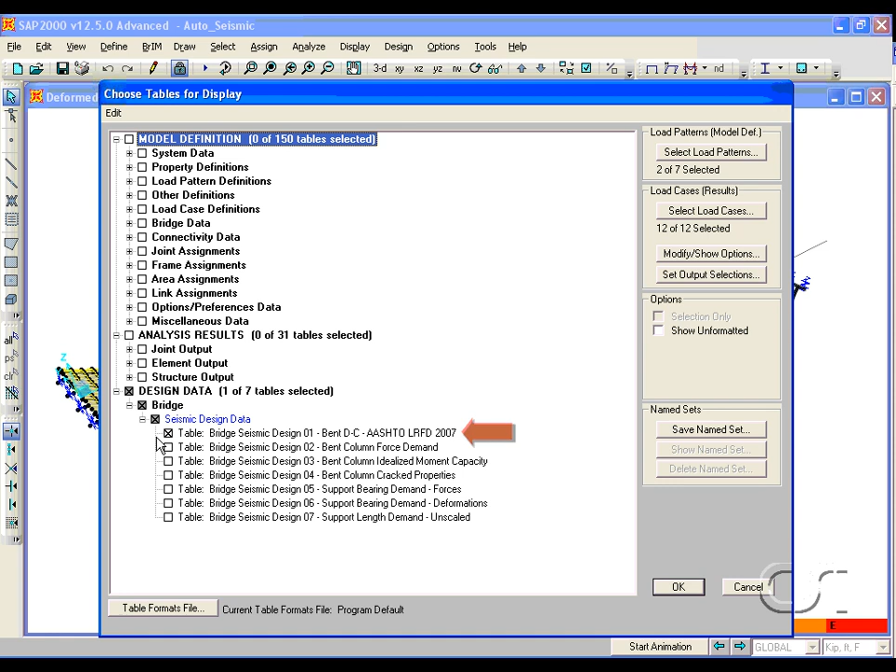Once the pushover analyses are complete and the capacity displacement has been calculated, the program automatically generates the demand capacity ratios, which can be viewed by going to the Display Show Tables command and selecting the Bent Demand Capacity AASHTO LRFD 2007 table. Here, for each bent and each direction, the table reports the demand, the capacity, and the ratios.

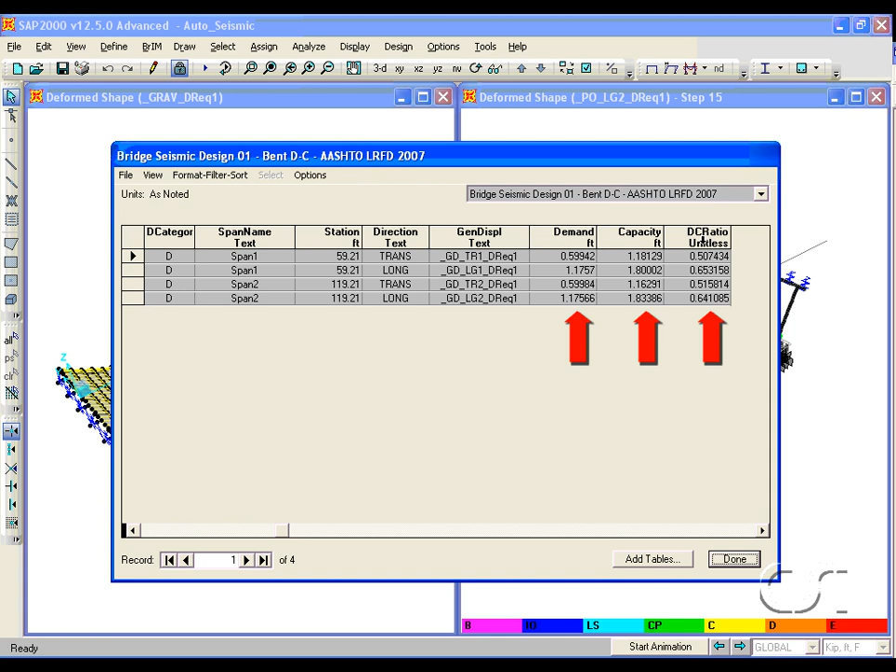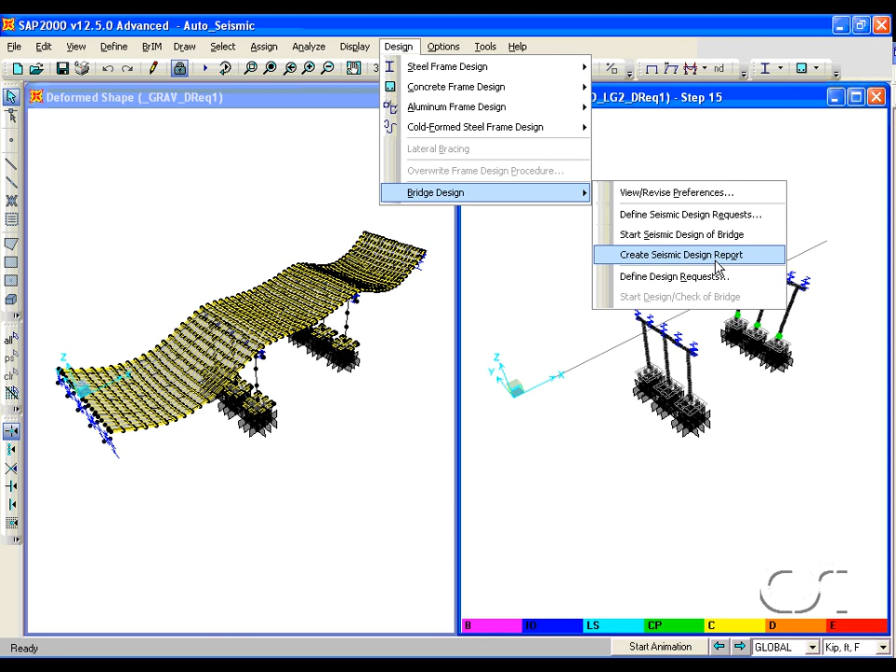The last step is to generate a seismic design report. The program will generate a comprehensive report with a single click. Go to the Design, Bridge Design, Create Seismic Design Report command. The report includes a complete table of contents, images of the model, bridge data,

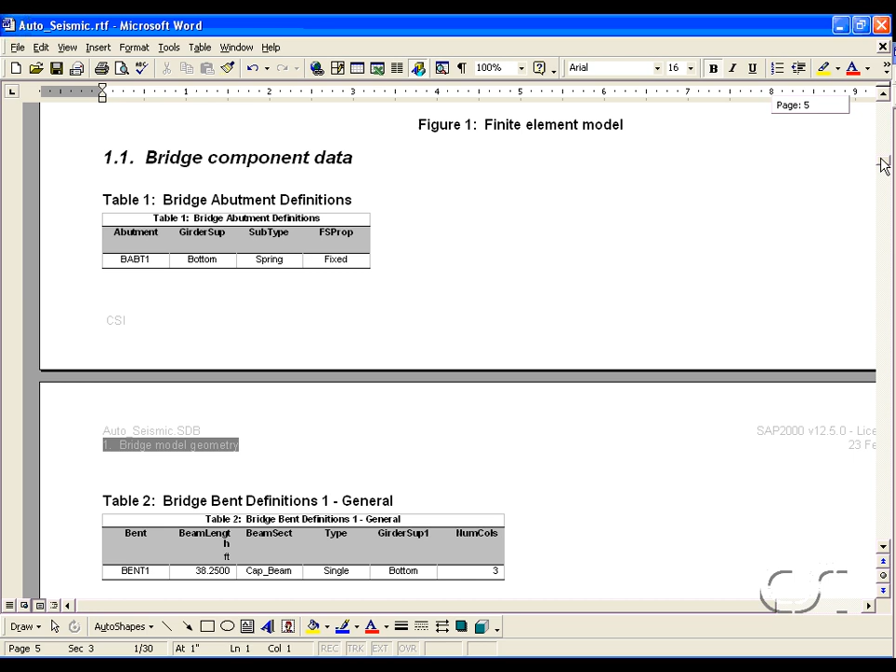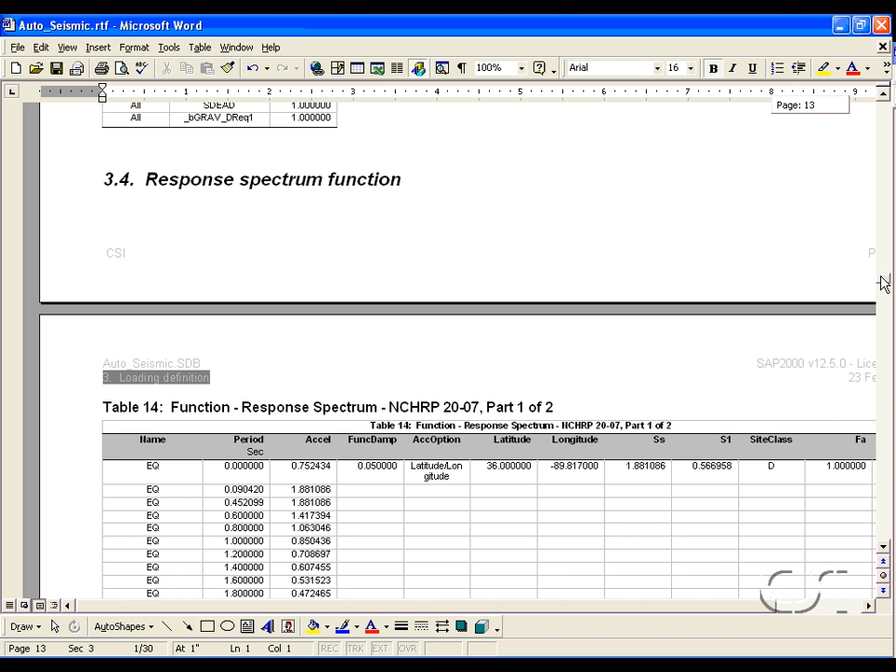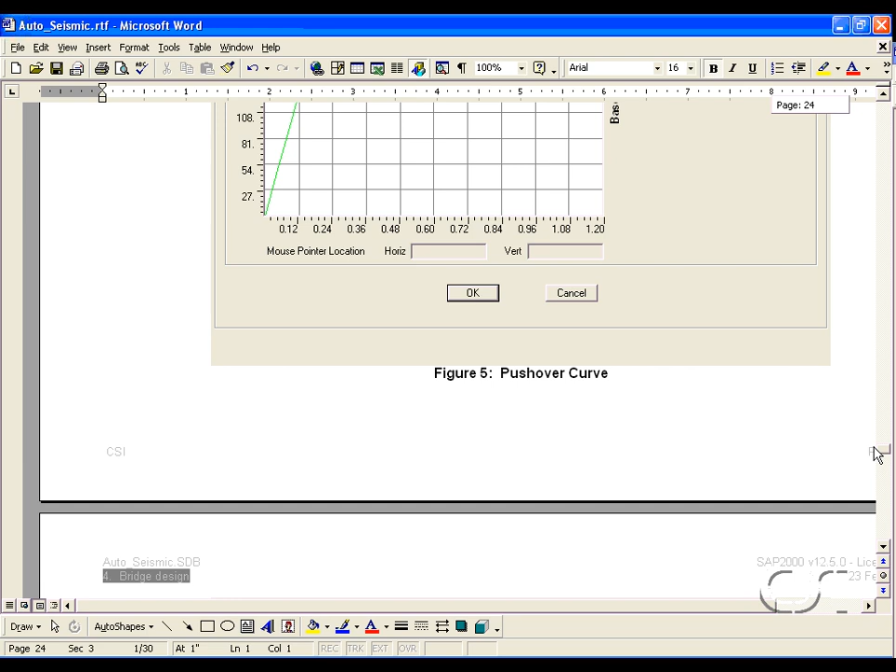section properties, loads, and all design results. Revisions may be done directly by the user. This concludes this tutorial on automated seismic bridge design.